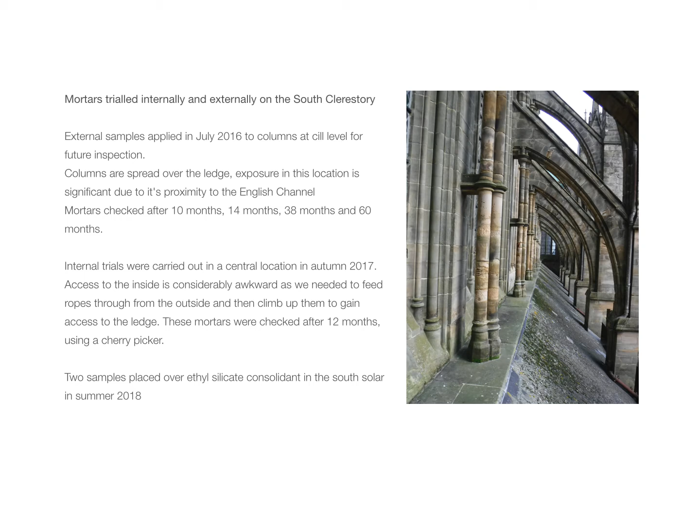Internal trials were carried out in bays 8 and 9 in the centre of the clerestory in autumn 2017. Access to the inside was considerably difficult as we needed to feed ropes through from the outside and then climb up to gain access to the ledge. These mortars were checked after 12 months using a cherry picker in conjunction with the bi-yearly inspection carried out by Michael. Two samples placed on top of ethyl silicate consolidant were carried out in the South Solar in summer 2018. These were checked yearly.

The trials included the use of several binders including quicklime, lime putty, natural hydraulic lime and cement with hydrated lime. The pozzolans used were metakaolin and buff brick dust. The aggregates used were Chardstock silica sand and Moreton Cullimore limestone sand, and the consolidant was Wacker OH100.

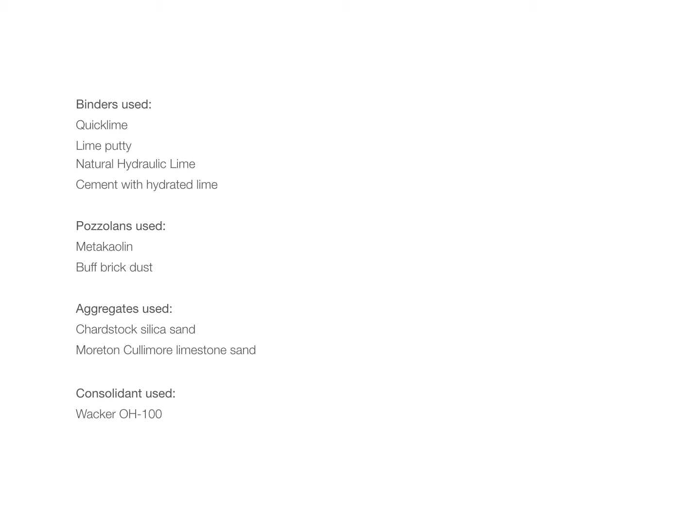The situation at Lancing offers an interesting environment for mortar trials. In 2008, a major repair programme was completed in which the ferramenta to the south clerestory windows were re-tipped and replaced. Mortar repairs were carried out comprehensively using natural hydraulic lime. However, these were decaying very rapidly due to the presence of chlorides in the mortars. This was confirmed using salt ion testing carried out internally. This presents us with fascinating results, as the decay patterns of the mortars are so clearly accelerated in comparison to a more common and less exposed environment.

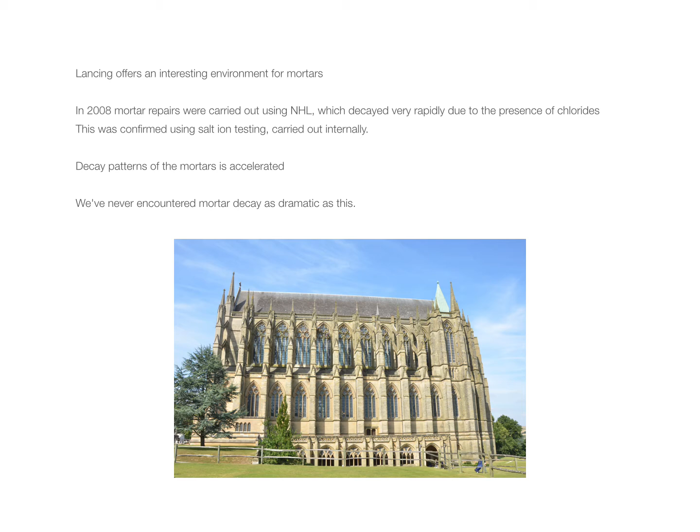As much of our work is rope access, we tend to work in exposed locations, but we've never encountered mortar decay as dramatic as this. The following slides will help illustrate this. The timeline of these slides starts with the earliest inspection top left, next inspection top right, and last inspection bottom right. Where the timeline stops at 38 months, it will be because by then it was almost fully decayed.

Here we have sample 11 on the left column, 3:1 Moreton Cullimore to lime putty with 10% metakaolin. And on the right column we have sample 12, 3:1 Moreton Cullimore with lime putty and 20% metakaolin. The inspections are at 9, 14 and 38 months.

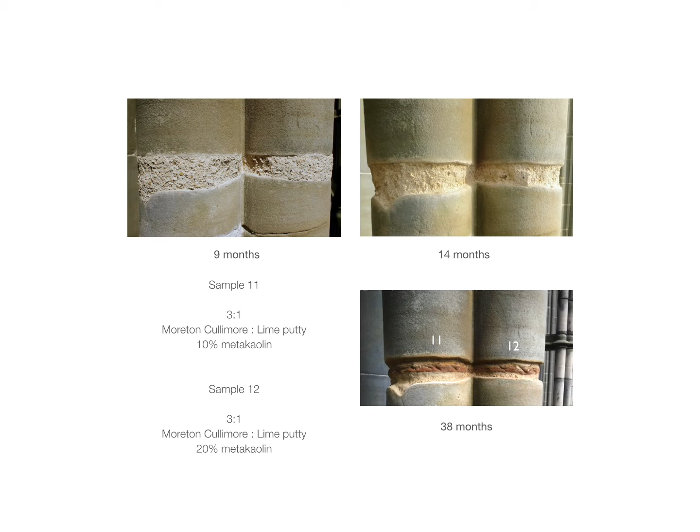Here we have an internal sample inspected after 12 months. It's the same as the recipes from the previous slide, however the concentration of lime to sand was upped from 3:1 to 2:1. So top left, 11B is 2:1 Moreton Cullimore to lime putty with 10% metakaolin. Top right is the same recipe with fibres added. Bottom left, 12B, is 2:1 Moreton Cullimore to lime putty and 20% metakaolin. On the right, the same recipe with fibres again.

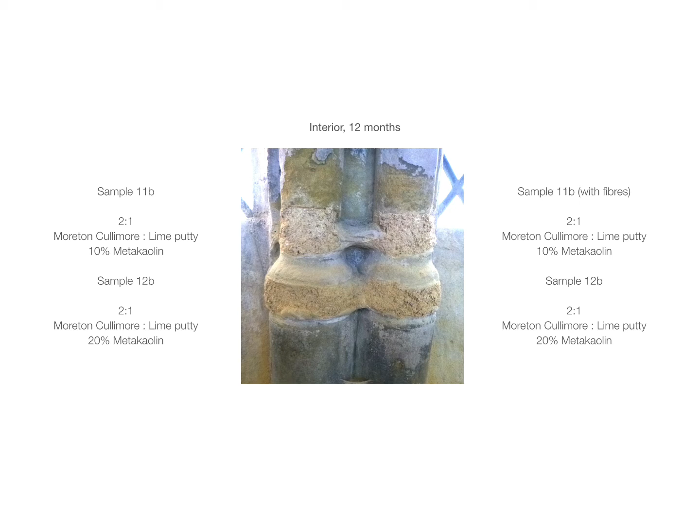Here we have sample 13 on the left column, which is 3:1 Chardstock to lime putty with 10% metakaolin. And on the right column we have sample 14, which is 3:1 Chardstock lime putty with 20% metakaolin, with inspections at 9, 14 and 38 months.

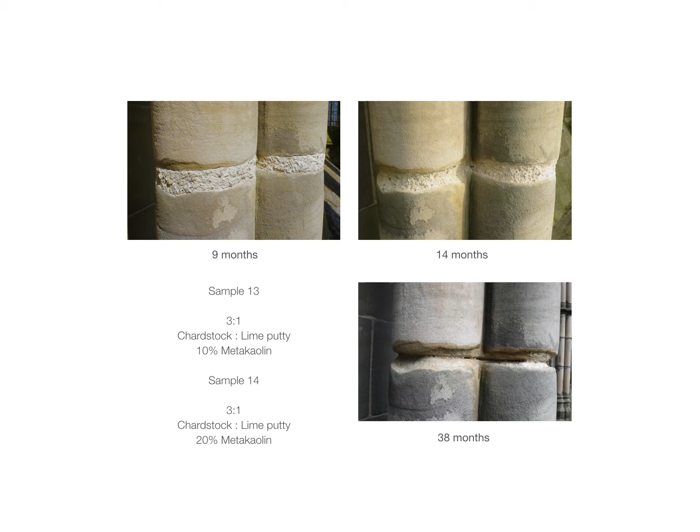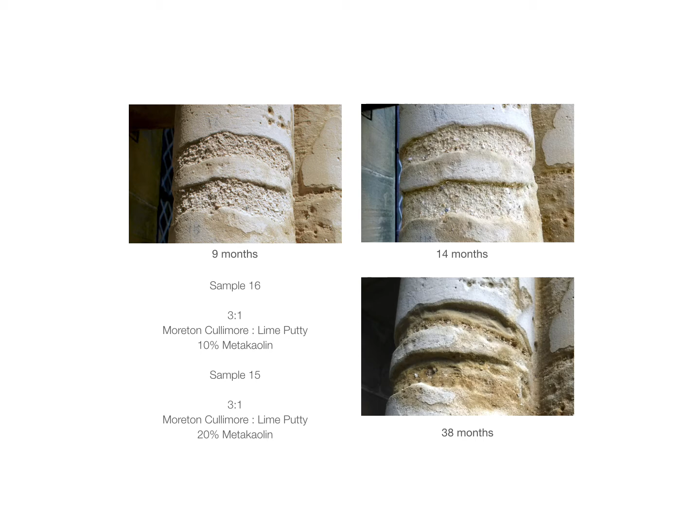Here we have sample 16, the upper of the two, which is 3:1 Moreton Cullimore and lime putty with 10% metakaolin. Then the lower of the two, sample 15, which is 3:1 Moreton Cullimore, lime putty and 20% metakaolin, with inspections at 9, 14 and 38 months.

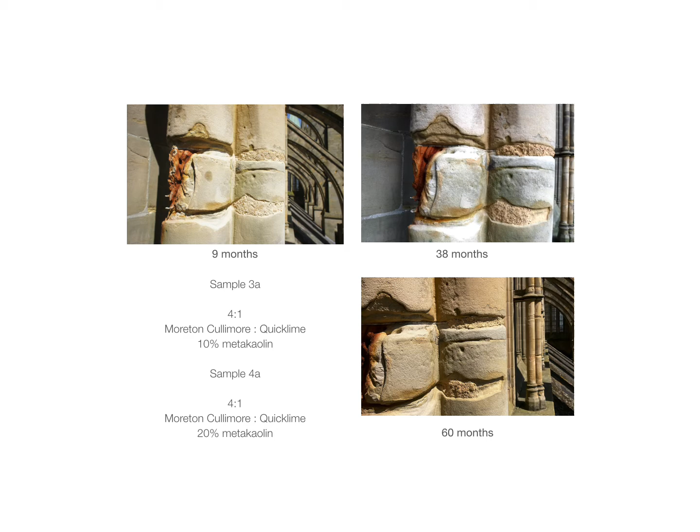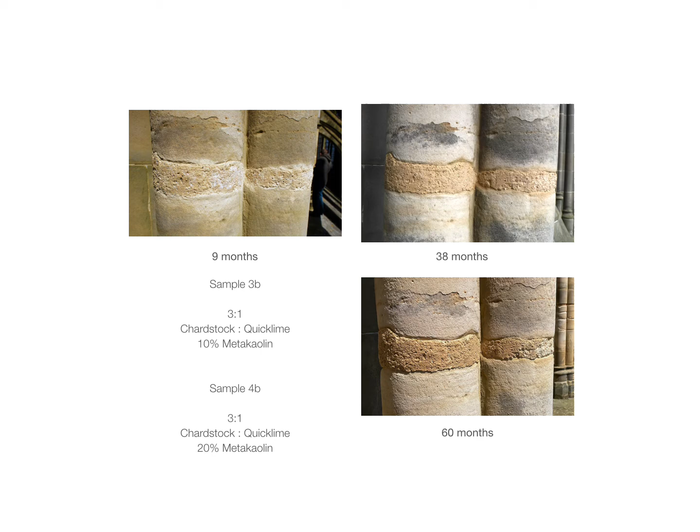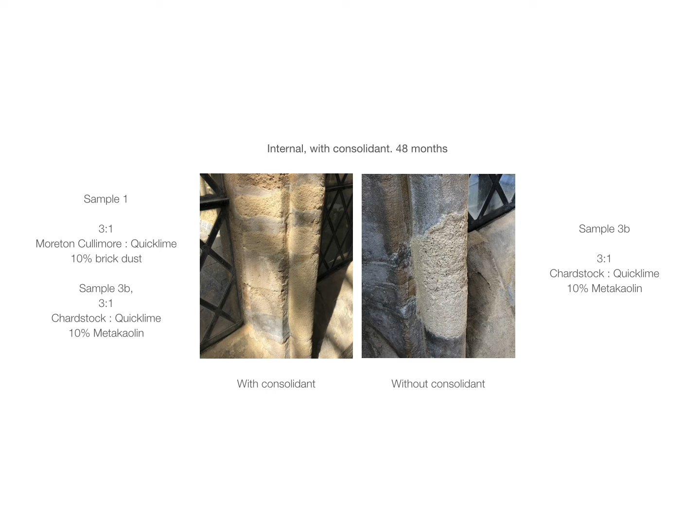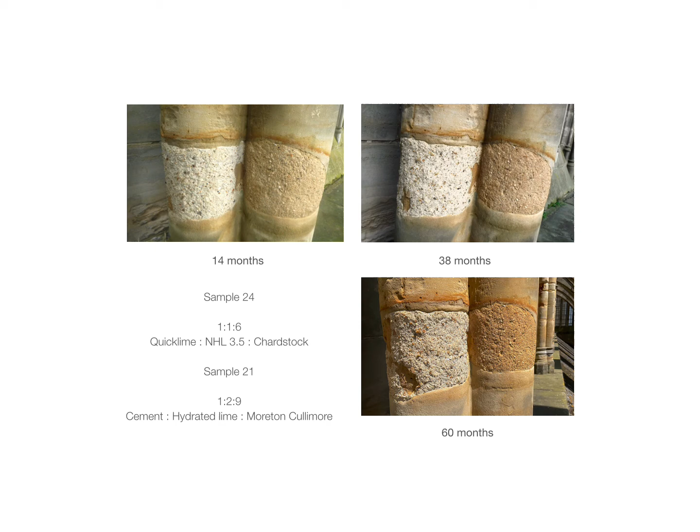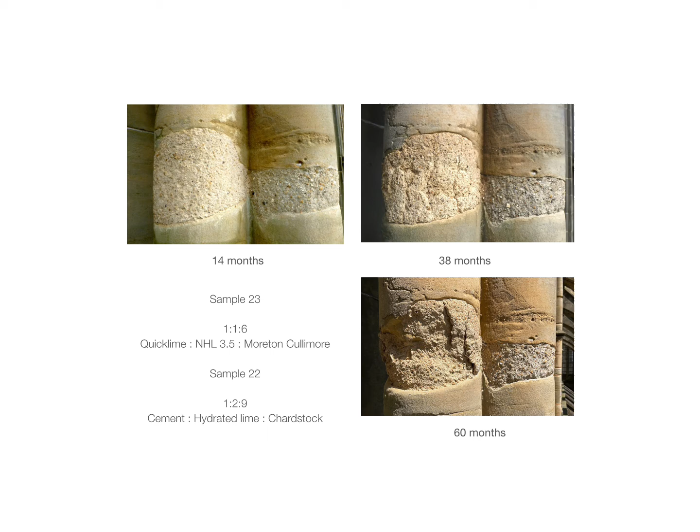Here on the left column we have sample 23, which is 1:1:6 quicklime to NHL 3.5 to Moreton Cullimore. And on the right column, sample 22, which is 1:2:9 cement to hydrated lime to Chardstock, with inspections at 14, 38 and 60 months.

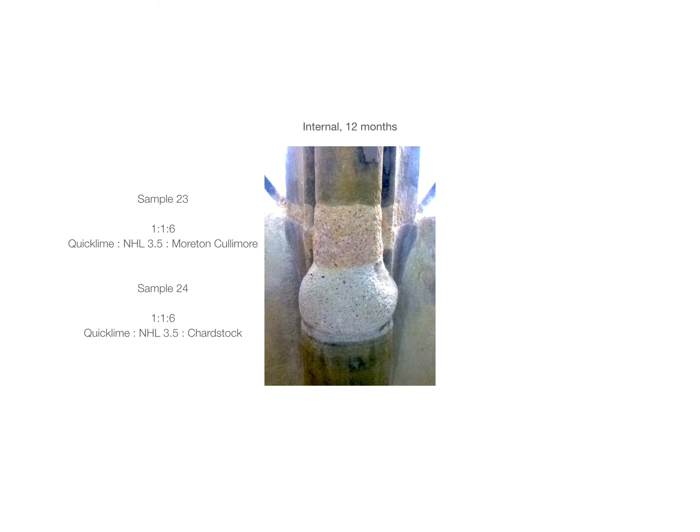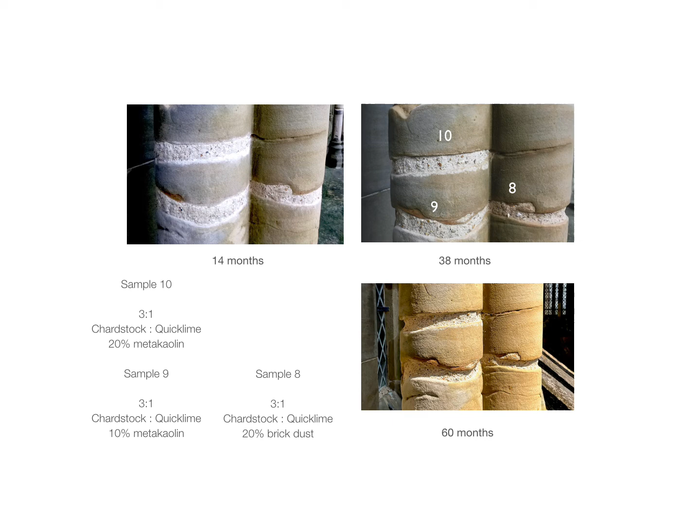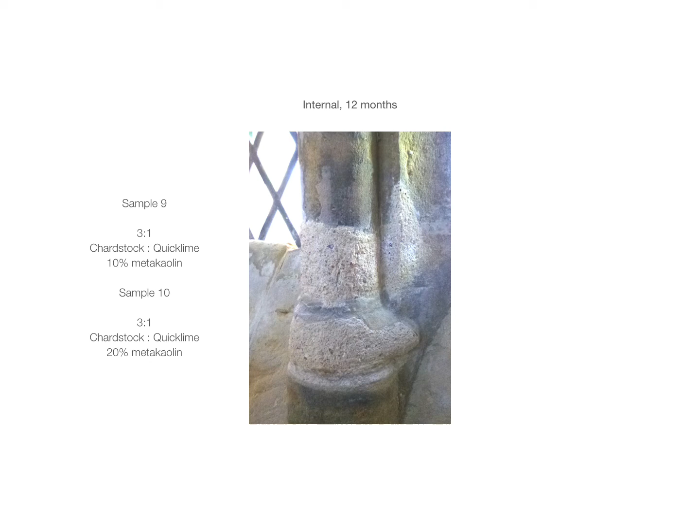Here we have two of the samples from the previous slide put on inside. The top one, sample 9, is 3:1 Chardstock to quicklime with 10% metakaolin. The lower is sample 10, 3:1 Chardstock to quicklime with 20% metakaolin.

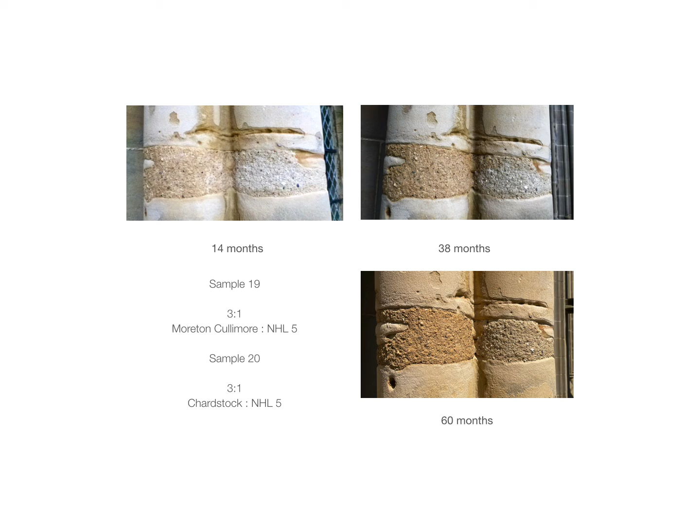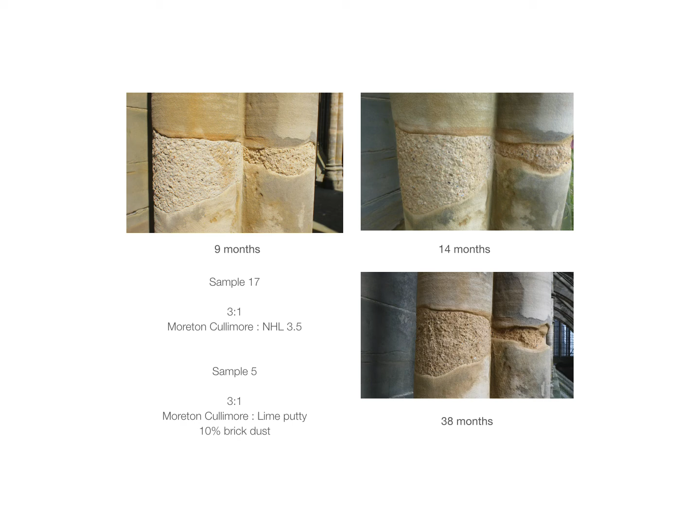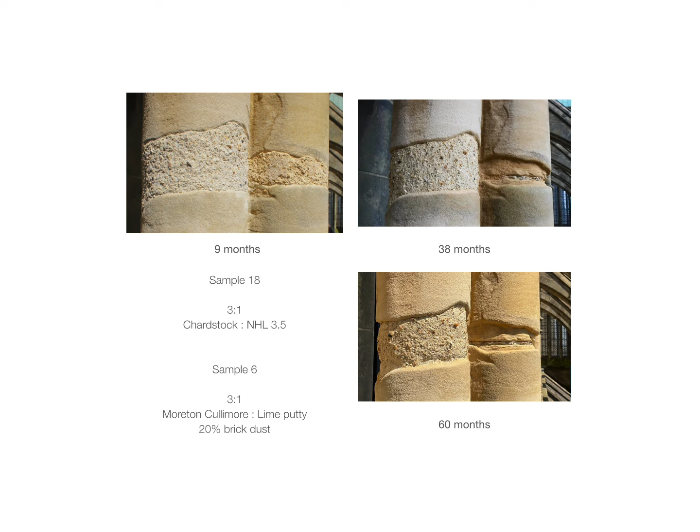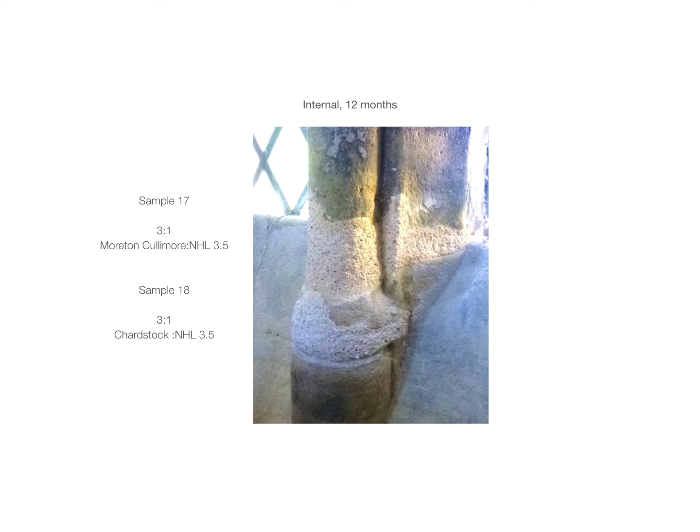Internal sample here after 12-month inspection. On the top we have sample 17, which is 3:1 Moreton Cullimore to NHL 3.5. And on the bottom, sample 18, 3:1 Chardstock to NHL 3.5.

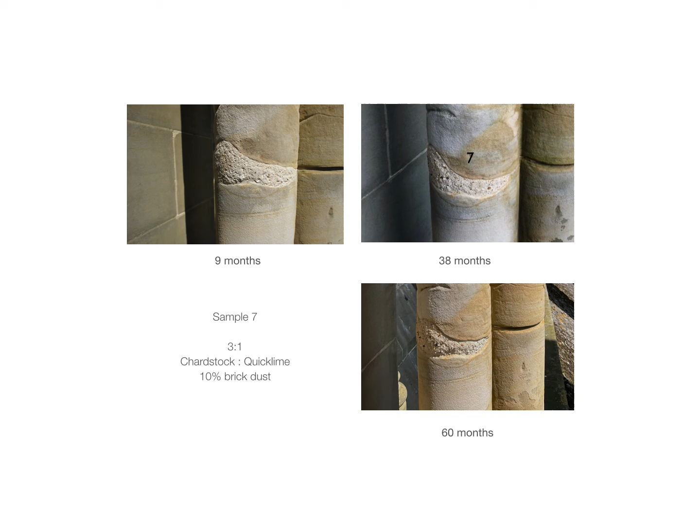Here we have sample 7, which is 3:1 Chardstock with quicklime, 10% brick dust, with inspections at 9, 38 and 60 months.

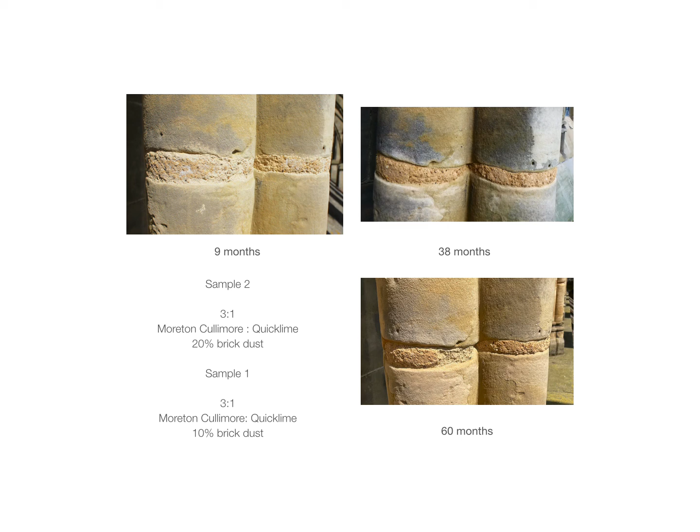On the left here we have sample 2, which is 3:1 Moreton Cullimore to quicklime with 20% brick dust. And on the right, sample 1 is 3:1 Moreton Cullimore to quicklime with 10% brick dust.

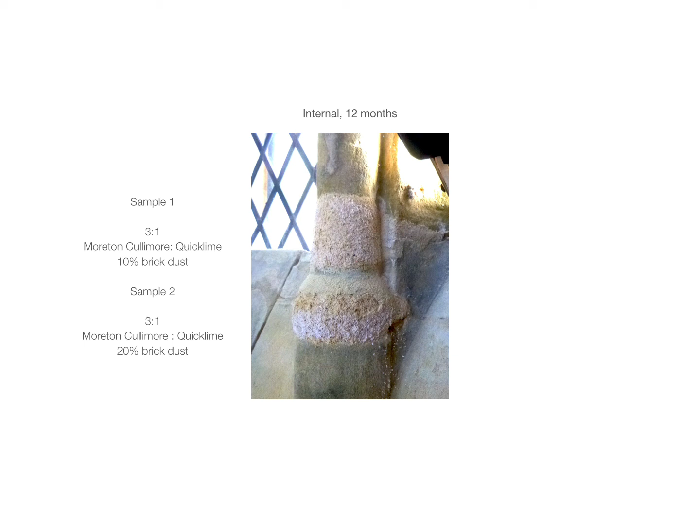So putty mixes have performed relatively weakly, decaying at an impractical rate. Internally, when gauged with NHL2, putty performed pretty well.

The hot mixes have performed reasonably well when used with brick dust, however when used with metakaolin tended to set too hard. When gauged with NHL 3.5 using silica sand, the resulting mortar had a good balance between durability and sacrificial qualities. Natural hydraulic limes have performed well with good durability and erosion rates.

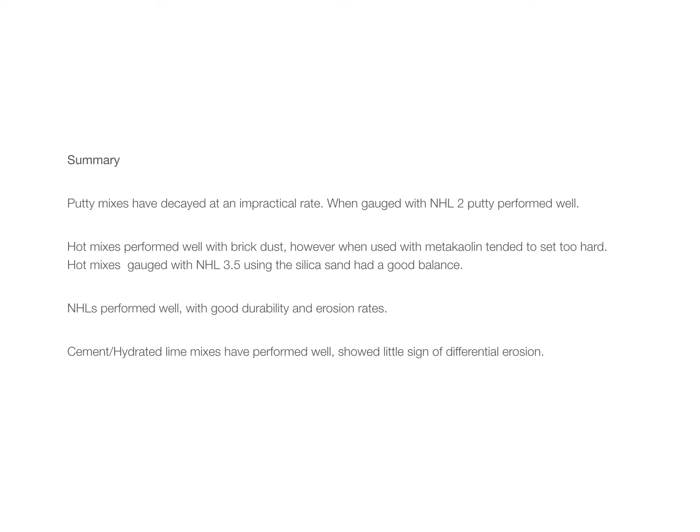Cement and hydrated lime mixes have performed surprisingly well with good bonding to the stone, showing little sign of the typical differential erosion you may expect to find between soft stone and cementitious mortars. It may be that in this environment the bond these mortars have with the stone offers better protection, as opposed to the exposure a sacrificial mortar presents to the substrate when subject to wind erosion.

The depths of the mortar repairs are not directly comparable, and the stone is also variable. They do, however, give a good indication of performance in this environment. Deterioration patterns may well continue to vary and will be monitored as part of our ongoing maintenance programme at the chapel.

Whilst the more dramatic results highlight the necessity for mortars used here to be durable, it is important that the mortars used in the future maintain sacrificial qualities also.

The results have given us a good range of behaviours to inform development of an optimum mortar composition. In our yearly programme, we've continued to use natural hydraulic limes until this year, when we have used a hot mix gauged 50-50 with NHL2 in a very exposed situation.

This mortar was very practical for use on the ropes, showing very little sign of shrinkage despite going into some particularly large joints. That's the end of my talk.